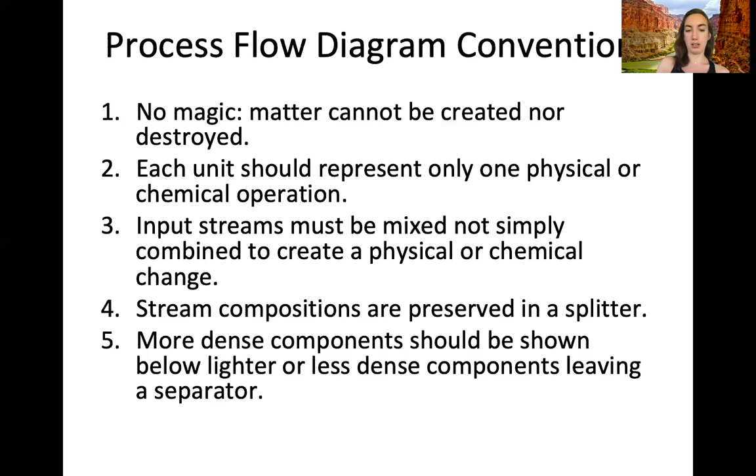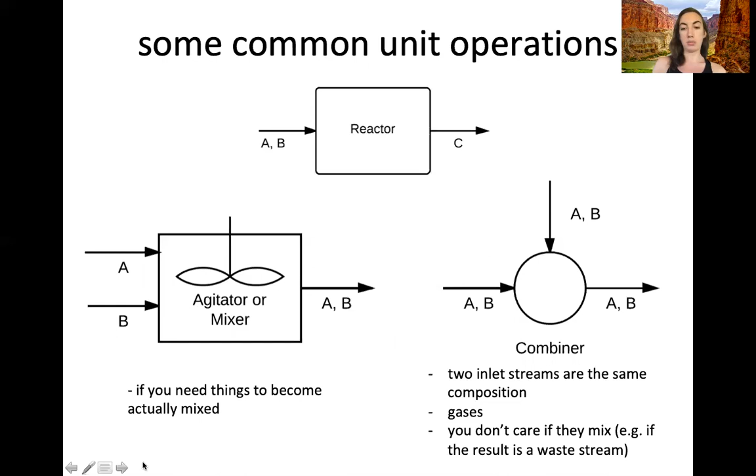Okay, just some unit operations that by now you've seen a bunch that you should recognize. So a reactor is just a box with different stuff coming out than came in. We just talked about when you can use a mixer and when you can use a combiner, so I won't spend time on that. And then heat exchangers, we draw with the little squiggle in the middle.

And then separators are actually doing work of trying to separate A and B. This doesn't have to be pure B and pure A for this to be a separator, but we're changing the composition. We've done something to try to change the composition. And then splitters are the opposite of that. There's a T-shaped pipe where the same composition is coming in as is coming out.

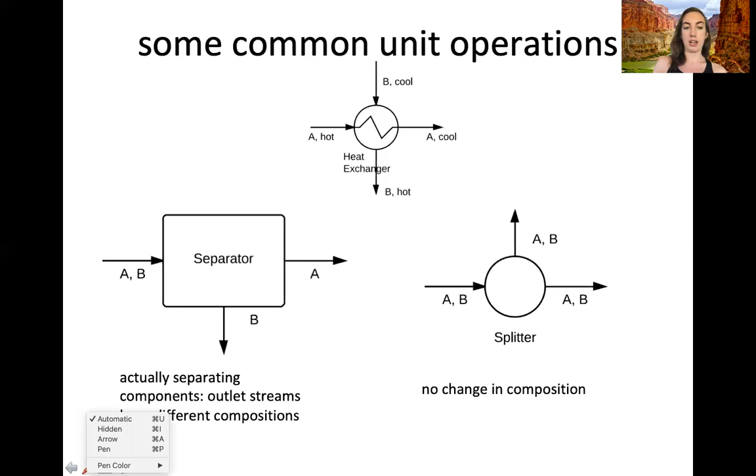Okay, so for process design, some important concepts are residence time, so how long will each step take, and the reason that's useful, among other things, is if you could buy 2 of any unit that is used in this process, which one would you pick? And you should try to improve the one that has the longest residence time, because that's our limiting factor for our process.

And then, again, we've talked about this a bunch, but whenever you're doing process design, once you've designed a process that works and accomplishes the technical goal, it's always worth going back through and adding heat exchangers and recycle streams to make your process more efficient. And then also just check the streams that are going into the whole process and out of the whole process. Make sure that there isn't a component that's coming in and also coming out, because that would just be inefficient.

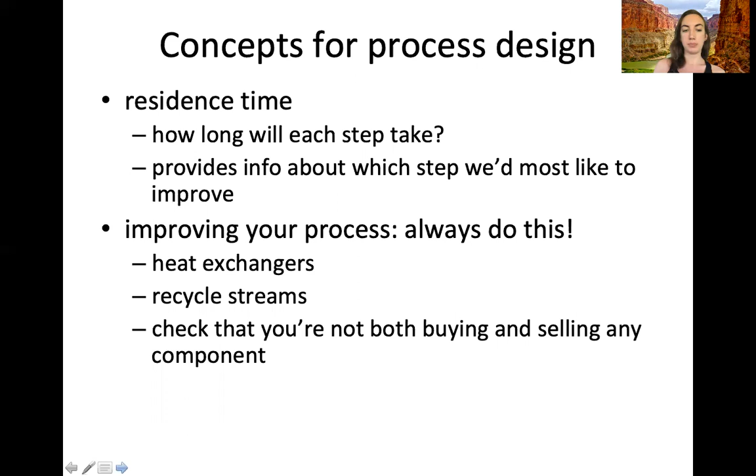Okay, so moving into separations. By the way, process design around separations, like that last midterm problem, is a really good practice for this. So I think if you got a really good score on that problem on the midterm, you should feel really good about this section of the material.

So the types of separation are phase-based separation, and often phase-based separation means you're changing temperature, not always, but often, in order to change the phase of one of your components. And if you are changing the temperature, you should list what temperature you're choosing to change it to. Then there's mechanical separation, so filters, sieves, centrifuge, that go based on size or density. And then affinity separations that are based on some chemical property like solubility.

So just some drawings of how these might look. Flash drums you should now be more familiar with than when we first talked about this. That's a boiling point based separation where you have a liquid mixture coming in and then a gas and a liquid coming out. Distillation is also by boiling point. A distillation column is basically a whole bunch of flash drums stacked on top of each other, so it gets you a better, more complete separation.

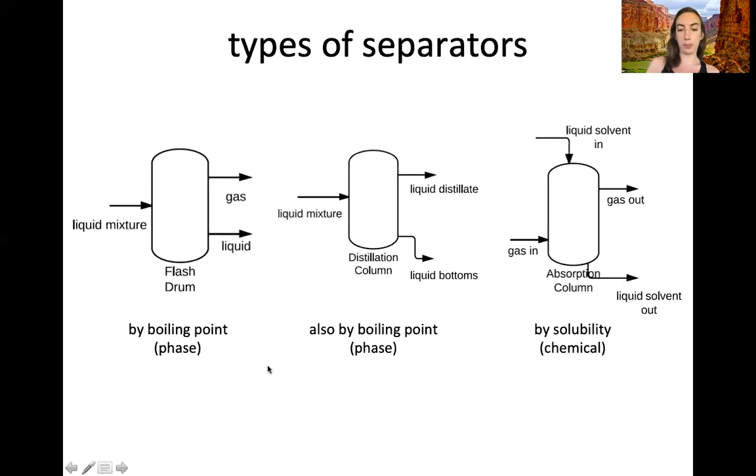And then very often you have a liquid mixture, and you need to decide whether to heat it to get a liquid-gas separation or cool it to get a solid-liquid separation. And all else being equal, you should choose liquid-gas. It's a lot harder to cool than it is to heat. Cooling is a lot less efficient. Exception being if your mixture is already at 200 C, then letting it cool to room temperature doesn't take any energy at all.

But if you're already at room temperature and deciding between heating to 100 or cooling to -80, heating is more efficient. And then also solids are just annoying. They are goopy, they stick to stuff, you have to move them in some way, and liquids and gases can just flow through pipes. And especially gases, I've said this a bunch, but if you just have a container with a liquid and a gas in it and you poke a hole in the top, the gas leaves and you have done very little work to make that happen.

Okay, I just want to again caveat this, that if you would have to heat 300 degrees to get a liquid-gas separation or cool 5 degrees to get liquid-solid, then you should pick liquid-solid, but this is just sort of guidelines, all else being equal.

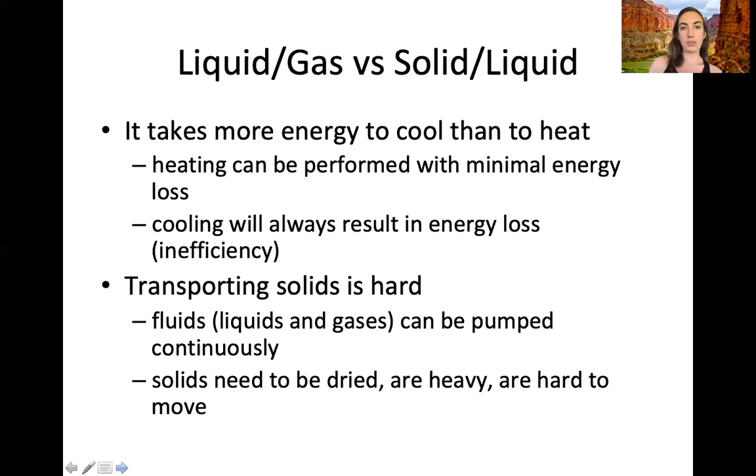And then before you randomly start doing a whole sequence of assorted separations for no good reason, think about what your actual goals are. So if you have a mixture of A, B, and C and you want pure C, maybe it's not worth isolating A and then isolating B, if you could just isolate C and leave an A-B mixture that you throw away. So think about that, efficiency-wise.

And then also we tend to default to phase-based separations because we spend so much time on TXY diagrams and flash drums and all of that. But sometimes there's a very obvious answer, from one of the examples we did in discussion: if I grind up this pouch, there will be plastic, it will float. That is easy. So look out for those obvious answers before defaulting to phase separations.

And then is there a relevant chemical reaction or affinity? And then, like I was saying at the beginning, what order of separations makes sense? Maybe if I have A, B, and C and I want all of them to be pure, but I have 1 mole of A, 1 mole of B, and 500 moles of C, then if I get rid of my C first, all of my other units can be smaller than they needed to be before. So that can influence what order you want to do your separations in.

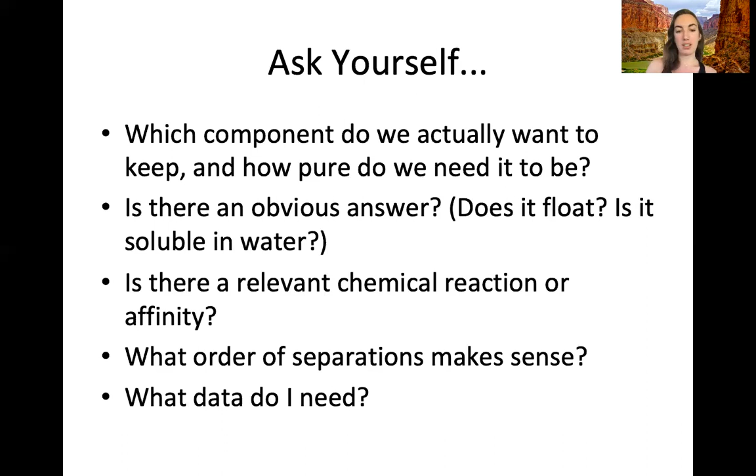Okay. A lot of questions about flow and steady state. This is a slide that I've shown before. Really, steady state versus transient, all you need to remember is that if anything is changing with time, it's not steady state. So steady state just means, again, nothing is changing with time.

So that first question on the midterm, where you had the fermentation in the kombucha bottles, that was not steady state because there's a reaction happening and the bottle is sealed. So there's no way for that reaction to be happening at all while you're still at steady state. If you're producing a product and that product has nowhere to go, it must build up. So whenever you're looking at a problem, just pause and think, will anything change over time, whether that's temperatures or amount of liquid in the system or compositions or anything like that.

And this came up with the project as well. You tend to not have to think about startup and shutdown. So in the case of the reservoir, I don't really care in what year Shasta Reservoir was established and how many years of average rainfall it took for it to get full. I just care that the community using this reservoir needs X gallons of water per year, and X amount comes in rainfall. It's really just the balance of in versus out, not how long it took us.

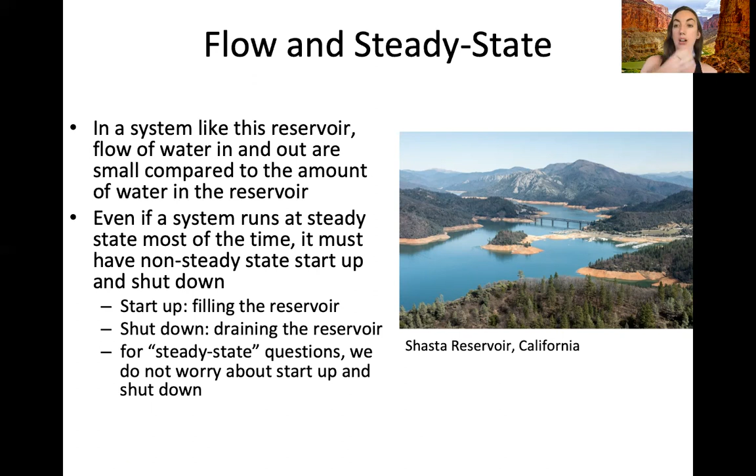Okay. These you should be very, very familiar with at this point, just some nomenclature on flow rates and composition. Flow rates are amount per time, and we call them like F1 would be the flow rate of stream 1, and the flow rate of component A in stream 1 would be FA1. Again, on exams, you can use different nomenclature if you want. Just be aware that I need to grade your exam and know what the heck you're talking about.

So if you decide to call something X instead of FA1, somewhere tell me X is the flow rate of stream 1. And then composition is mole fraction or mass fraction, or percents if you want, if you multiply them by 100. So the mole fraction of A in stream 1 is the flow rate of A in stream 1 divided by the total flow rate of stream 1. And so if you just sort of rearrange that, you get the equation FA1, the flow rate of A in stream 1, equals the mole fraction of A in stream 1 times the flow rate of stream 1.

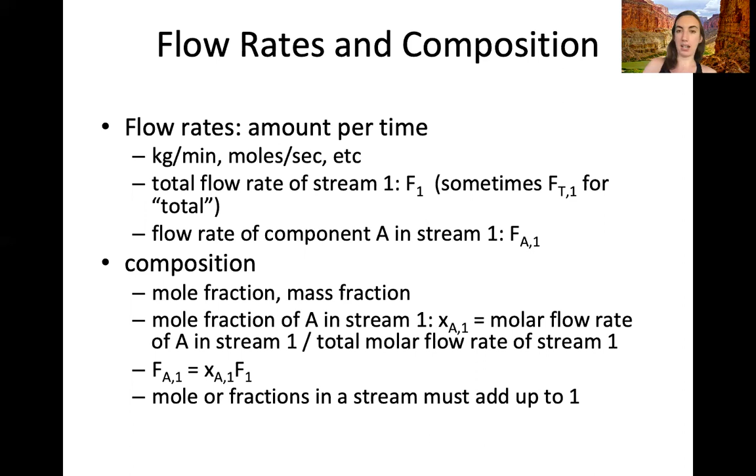And then the mole fractions in a stream have to add up to 1. Obviously, you can't have a stream that's half A, half B, and half C. That doesn't work. Okay, so mass balances, you should be able to recite this equation in your sleep, both for this class and for the rest of your career in chemical engineering or any kind of engineering. Accumulation equals in minus out plus generation minus consumption. If you are at steady state, and only if you're at steady state, accumulation is 0.

So that was a mistake that people made a lot with the kombucha problem, is you're so used to everything being at steady state that you just crossed out accumulation sort of by default. And then in and out are flow rates, and generation and consumption are due to reaction. So if you have no reaction, you can cross out generation and consumption. And if you're at steady state, you can cross out accumulation, and then you'll get in equals out. But again, just be careful.

A lot of people are so used to in equals out that they just sort of default write that when maybe there is accumulation or generation or consumption. But as on the midterm, you should be able to spit this out in 0 time. You should not need to look at your notes for this one.

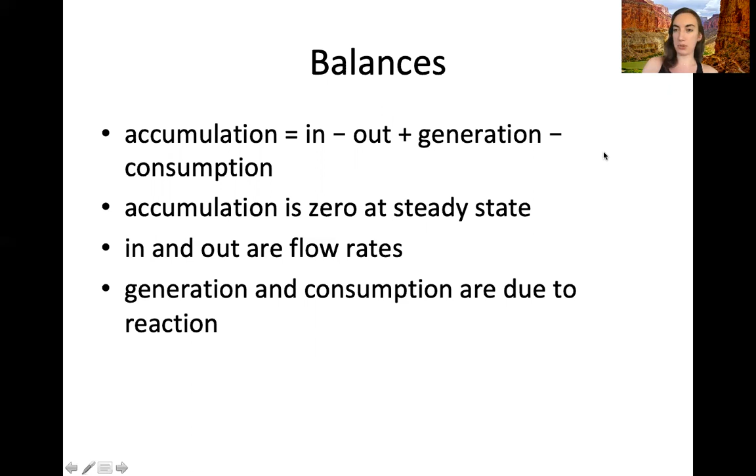Okay, and then because we haven't really talked about this in a while, when to use mass versus moles. Mass is always conserved. Moles are not necessarily conserved. If there is no reaction at all, do whatever you want. Mass is conserved, moles are conserved. Mass of any given compound is conserved, so are moles. Everything is just easy. If there is a reaction, then total mass is always okay. And then moles or mass of elements, so hydrogen, carbon, are also okay.

But mass of a species or moles of a species like H2O or CO2 are not okay, unless you're going to sort of explicitly account for the generation and consumption terms. But you can't say H2O in equals H2O out if there's a combustion reaction happening, or any reaction that involves H2O. And then this came up on the midterm, but also comes up really anytime. If you are using stoichiometry at all, you need to convert to moles as you're doing that.

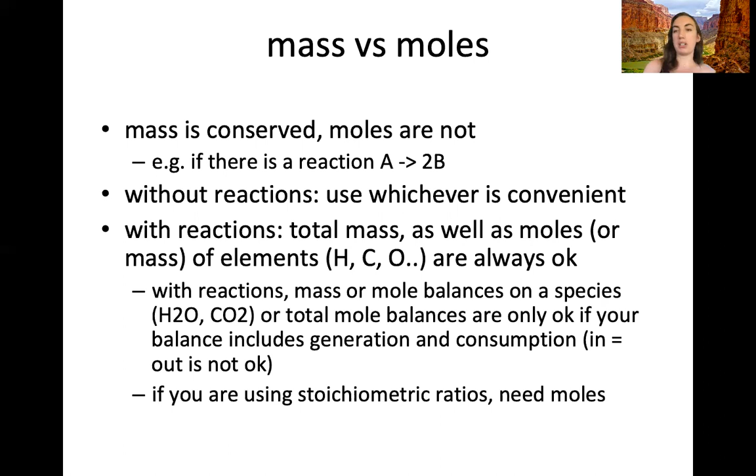So when you were trying to find the limiting reactant, and you know the stoichiometric coefficients, you need to convert to moles before those stoichiometric coefficients are useful. So if you have A plus 2B goes to C, you know you need twice as much B as A, but you need twice as much B as A in units of moles.

Okay, and with mass balance problems that involve sort of multiple steps, the way that I always do it, and what works for me, but again, feel free to ignore this, is draw out your PFD if we haven't given it to you. Often on exams, we'll sort of give you the bones of a PFD just so you don't have to deal with that. Fill in any known information.

I do that just because I want everything I need to know on my diagram and not in the sort of paragraph of text describing all of this. So I draw my PFD, read through the text once, and translate all of that onto the PFD, and then never look at the block of text again. Or if I'm checking my work, I'll read it again.

But I don't want to have to keep sort of jumping back and referencing that. And then if there's any additional information, like a reactor conversion, or the flow rate of stream 3 is 5 times the flow rate of stream 2 or whatever, just writing that out in equation form. And then find a mass balance of any kind that has only one piece of information missing, meaning that I can solve it. So this is usually the hardest part, is sort of finding the first place to start.

And I usually just sort of scan around, and usually, we're not going to give you a PFD that has 30 units and infinite balances, right? So there's only so many balances there are, and just sort of think about what you're looking for and just sort of scan around and try to find a balance that will be useful for that. So that can be a total mass balance over the overall system if you happen to know the total flow rates of all but one of the streams, a component balance over the overall system, or some subsection of the system. If you know a lot about the first separator, start there, whatever works.

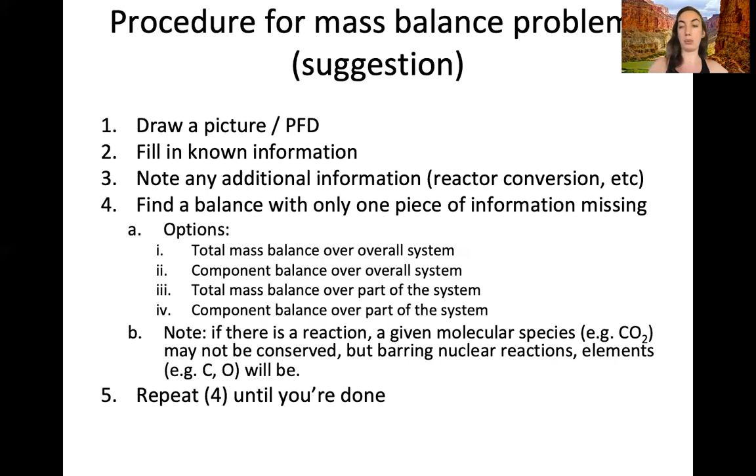And then just sort of, now you have one more piece of information, where does that lead you? And you just sort of follow that. And just be a little careful, because a lot of times you don't need to fully specify every stream in the system in order to get what we have asked for. So sort of after a couple balances, pause and say, am I moving in a direction that's useful to get me to the one thing they asked me to solve for?

And then this was also tested on the midterm. So the conversion of A, we call capital XA, and that's what fraction of A that entered has been converted into something else, anything else. And so, I guess this final is open note, so the don't memorize anything mantra is less relevant, but you also shouldn't need to look at your notes for this one. The conversion is just how much was converted divided by how much came in. And how much was converted is how much is no longer there in our outlet stream. So that's in minus out, divided by in.

And then be comfortable with the difference between reactor conversion, which is just the conversion on the specific subsystem that is just the reactor, versus the overall conversion, which is the conversion in your system as a whole. And if the reaction you're looking at is sort of the whole purpose of the system, to make B or whatever, your overall conversion should be higher than your reactor conversion. That's sort of the whole point of having a recycle stream or anything more than one reactor.

Limiting reactant is which of your reactants will run out first. So there's a lot of ways of solving for this. The one that I always use is I convert everything to moles. I pick a reactant and I say, in order to fully consume A, how much B do I need? If I have more B than I would need, then A is limiting. If I don't have enough B to use up all my A, then B is limiting. But I think a lot of you did it a little differently on the midterm and got it right, and that's great. Whatever works for you.

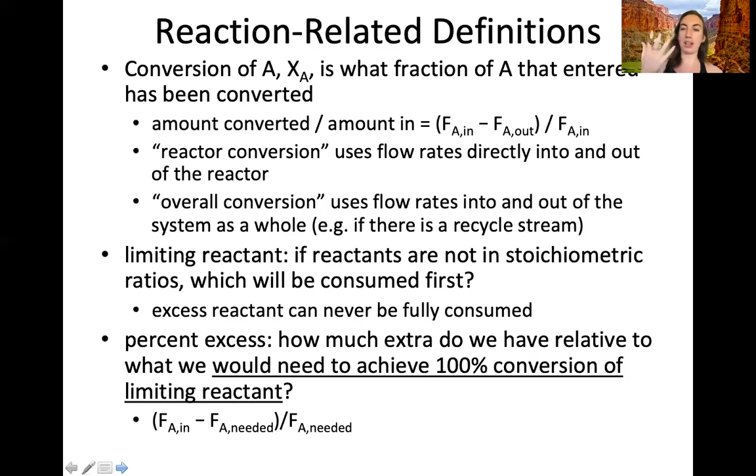And then the last thing is percent excess. And this one is tough. It's how much extra do we have relative to what we would need to achieve 100% conversion of the limiting reactant. So F out is not ever in this equation. So it's FA in minus FA needed, divided by FA needed. So what's in the numerator here is how much we will never ever need, even if we had perfect conversion, divided by how much we would need. So that one you might have to look at your notes for, just because there's a lot of ways that make intuitive sense of thinking about percent excess.

Okay, so that so far is what was relevant up to the midterm. And then everything I'll talk about from here on out is the stuff we've learned after the midterm.

So now would be the time to pause and get water or whatever. Okay.

So just going through in order of what discussion sections we did. Discussion section 7, which is the one right after the midterm, was on Excel and how to use Excel. You don't need that for the exam. We're not gonna ask you to use Excel, so if you don't have Excel on your laptop at home, that's fine. And in fact, please don't try to solve a problem in Excel on the midterm.

It is very hard to actually show us step by step your work. And so if your final answers in Excel are wrong, it's really hard for us to figure out what went wrong. So you would be hurting yourself. And we won't ask you any problems that are like, solve this problem 5 times with 5 different inputs, which are the kind of problems that Excel is really useful for, so that you can just change one number and everything changes. We won't ask you a problem like that. So put the Excel away.

That said, that week we did discuss some sanity checks, which are, once you've built your spreadsheet in Excel, or when you've solved a problem without Excel, it's always a good idea to check, does the answer I got make sense? Is my conversion over 100%? That's probably wrong. Is a flow rate negative? Provided that flow rate is mass, that's probably wrong. If it's energy, I guess you could have the energy flowing in. But with energy, you should be able to think about, does the sign of this make sense to what I thought it was going to be?

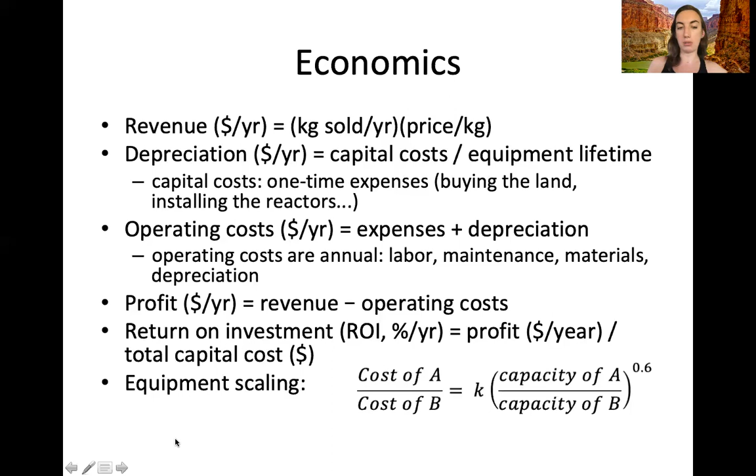So one practice problem if you want to test yourself is if I put 1 liter of room temperature water on the stove, how much energy have I put into it by the time it has all boiled? And the way you would do that is figure out how much energy it takes to heat the water to its boiling point, and then how much energy does it take to boil off all the water.

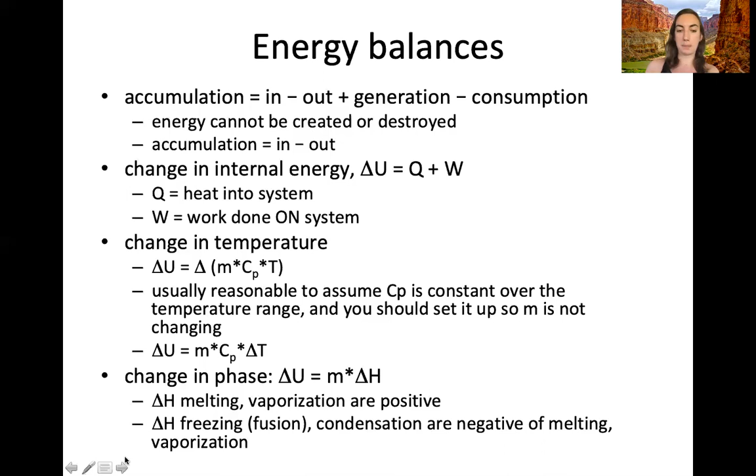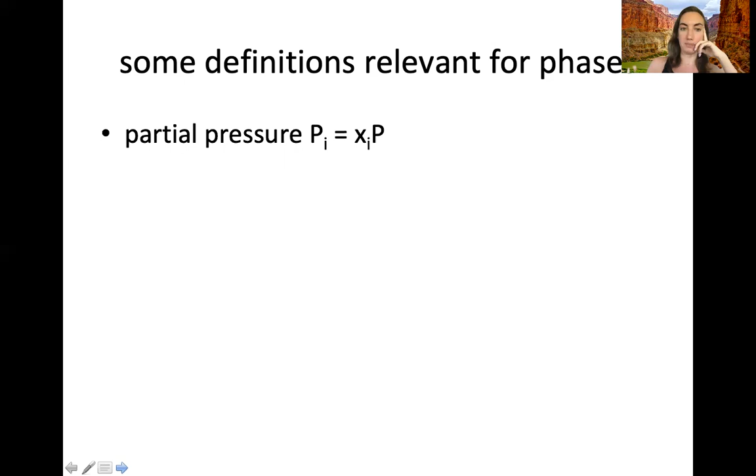And then some definitions that are relevant for phases. Our partial pressure, P_i, where i is our component, so A, B, water, whatever, equals x_i, so the mole fraction of i, times the total pressure, P. And then specific quantities are those quantities sort of divided by amount. So specific volume is volume per mass and is the inverse of density, and we would draw that with a little bar on top.

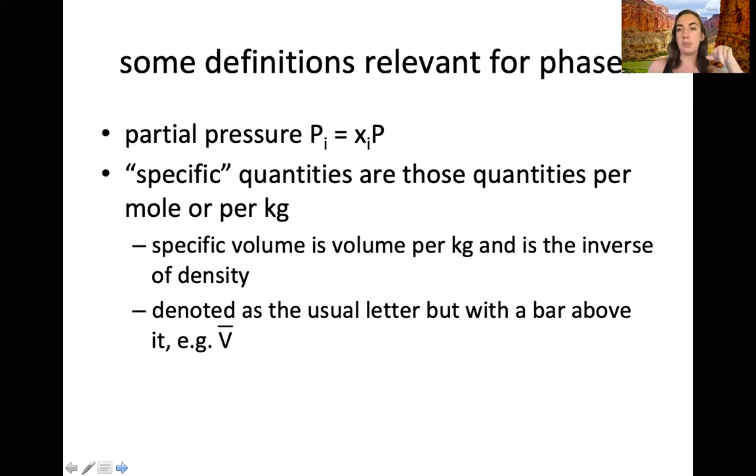So that comes up sometimes with, well, first of all, PV diagrams. The V is specific volume on the bottom, but then also another way of writing the ideal gas law is PV equals nRT. If you divide the n over to the other side, you have V over n, and that is specific volume. So you might write P times V bar equals RT.

And one thing that comes up a lot is people get confused because they know that phase equilibria exist. And so TXY diagrams exist where there's this whole region of liquid vapor equilibrium. But what you should remember is that these are single component phase diagrams. So you're looking at pure water, and pure water at 1 atmosphere has a sort of immediate phase transition at 100 C. And that's very different from water when there's air around, in which case there is a wide region of phase coexistence.

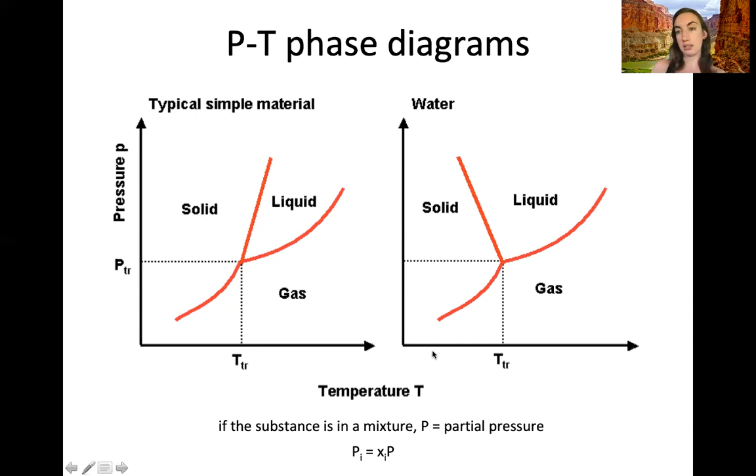And just sort of recognize that because water is weird and the solid is less dense than the liquid, this solid-liquid coexistence line is tilted the wrong way, relative to what we'd expect for a normal mixture. So we should be able to give you a PT diagram and say, is this water or not? Okay.

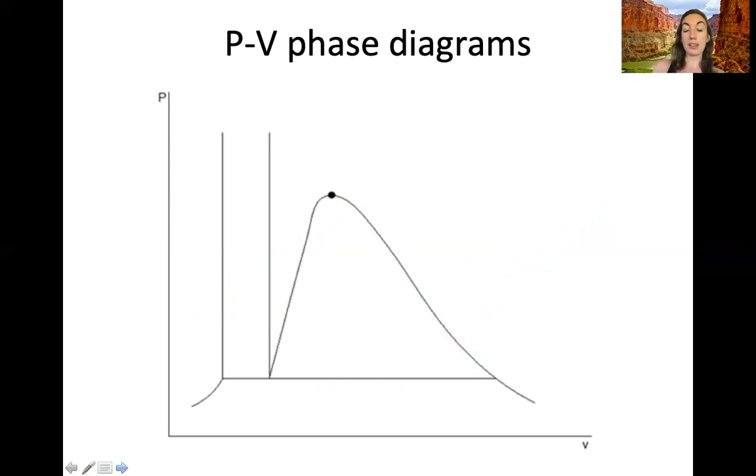PV diagrams are a little more confusing for people typically. And so you should be able to label all the regions on a PV diagram and justify how you know which region is which. So the way that I think about it is, I know that the thing with the biggest volume is always going to be vapor. Gases are much bigger than liquids or solids at the same pressure and temperature. One thing to note is that PT diagrams are at constant volume and PV diagrams are at constant temperature.

Okay, so our biggest thing is vapor. And then also typically our smallest thing is solid. So PV diagrams of water look a little weird because the volume of the solid, that region can look weird. But for a typical substance, the smallest volume thing is going to be a solid. And then we know that there must be solid vapor coexistence somewhere, and the only region that touches both solid and vapor is like this region down here, so that one must be solid vapor.

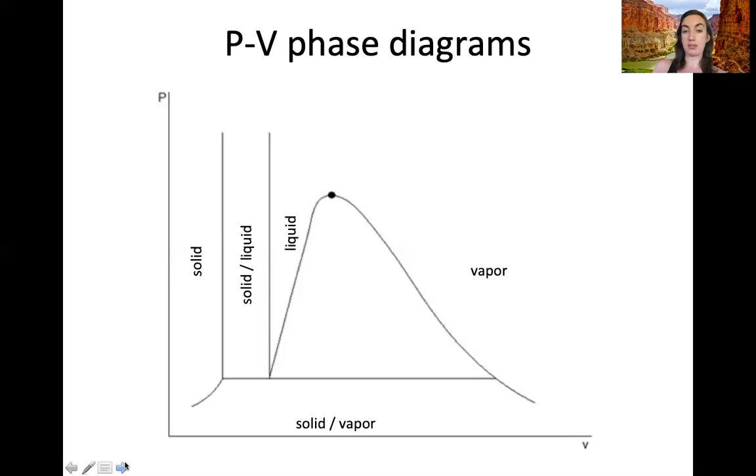And then similarly, solid has to touch liquid somewhere, and the only other region that's touching solid is this one right here, so that has to be solid liquid. And then obviously the solid liquid region must touch the liquid region, so this one has to be liquid, and then our last one has to be liquid vapor. So that's how I remember it. That's not to say that there are no other valid explanations.

And then the critical point, which is sort of where liquid and vapor become indistinguishable, is this point right here, above which liquid and vapor stop making sense. Okay, oh yeah, and then the triple line is anywhere that touches all three phases. So in this region, we've got solid liquid and solid vapor, so we've got all three. And then over here, we have liquid vapor and solid vapor, so we have all three. So what was a point on our PT diagram is now a line on our PV diagram.

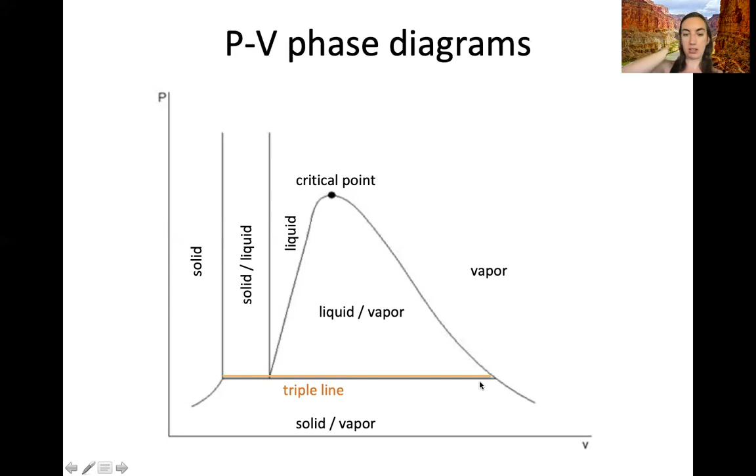Then we also talked about degrees of freedom. So that is the number of variables to fully specify a system. So we should be able to say on this PT diagram, find a point with 2 degrees of freedom, find a point with 1 degree of freedom, etc.

So the rule that we use for that is called the Gibbs phase rule. And that is the degrees of freedom, DOF, equals 2 plus C minus P. And people always want to memorize this one and, again, always get it wrong. So the way I remember it is I know that the triple point is a point on my PT diagram, and so it must have 0 degrees of freedom.

So if I plug in to what I think is the equation, 1 for components, so it's a one component system, and 3 for phases, because it's the triple point. It has solid, liquid, and gas. I should get 0 degrees of freedom. So that's a way for you to just check. 2 plus 1 minus 3, yes, that's 0. Okay, I have the form of this equation correct.

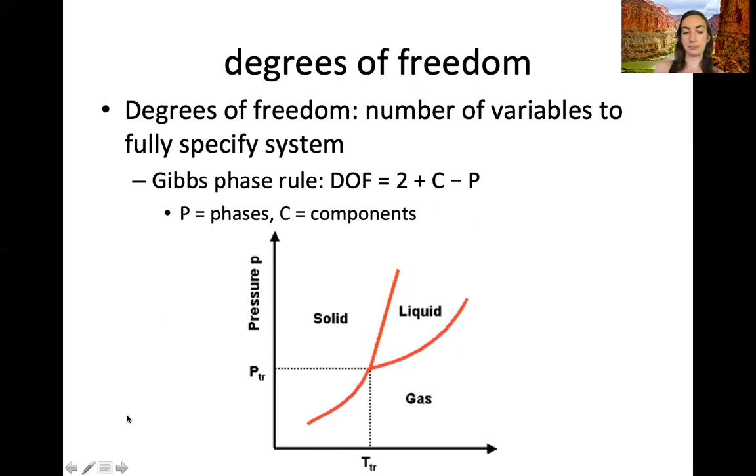And then we talked about Raoult's law a little bit towards the end. So Raoult's law applies to ideal mixtures, and the equation is just the partial pressure of I equals the saturation vapor pressure of component I, so we call that Pi star, times the mole fraction of component I. So the definition of saturation is just the maximum concentration a component can reach in a mixture.

So we often think about water vapor in air, and at the point that it reaches its saturation concentration, we will get rain or fog; there can't be that much water in the air and some of it will start to condense out. Mole fraction, we've talked about a lot. It's the partial pressure of I or X or A or whatever component you have divided by the total pressure. And that will equal the partial volume or the molar concentration.

And then the equilibrium vapor pressure is the pressure exerted by vapor in equilibrium with its liquid phase. And we often apply all of this to water to get humidity. So humidity is just the partial pressure of water in air. And that's not so useful because how humid that will feel to us depends on how hot it is. So we often talk about relative humidity. So the humidity today is 80% or whatever it is.

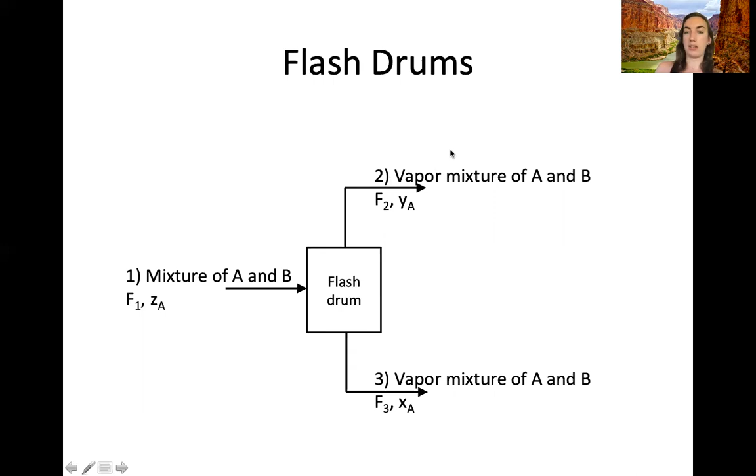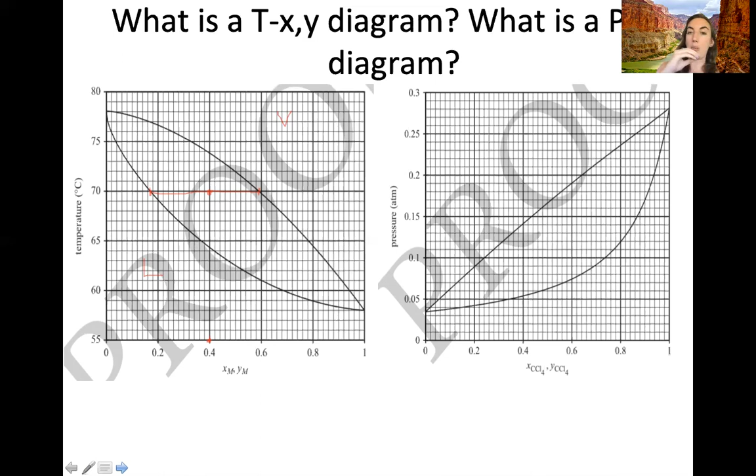So we now already know we have two streams leaving our flash drum, one vapor and one liquid, and we already know the composition. And then what we use to find how much stuff is in the vapor versus the liquid is what's called the lever rule. You guys have used this on your homework. And basically what we find is the fraction of the feed that becomes vapor is the length of the liquid arm divided by the total length of the tie line.

And I've talked about this before, but the way that I remember that is that if I have my liquid mixture, I heat it up just above the bubble point, I'm gonna have one very small bubble of vapor. And my liquid composition is gonna be pretty close to my inlet composition because I only have some small bubble. So why would the liquid composition change very much when I haven't removed that much stuff from it at all? So the length of the liquid arm is going to be really short because the liquid composition is really close to the feed composition. And so our fraction of vapor should be small because it's a small bubble.

So you want to divide sort of the small part of the tie line by the total length. So in this case, if I wanted the fraction that becomes vapor, I would take the length of the liquid arm, which is the part of the tie line touching the liquid, divided by the total length of the tie line, and that's what fraction of stuff in the feed will become vapor.